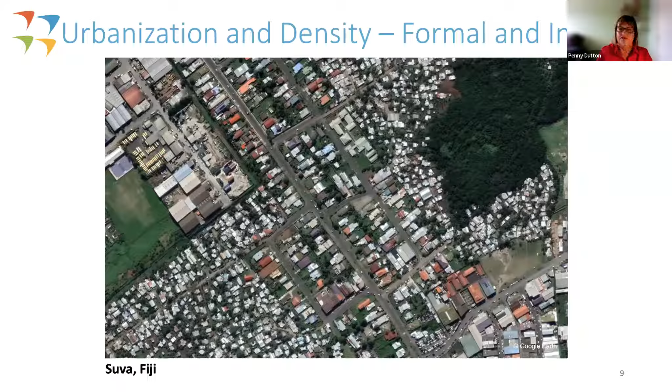City development can take many forms, and as you can see in this photo from Suva, there are dense informal settlements amongst lower density, more formal settlements. Combining that population and urban growth with higher population densities and expansion of urban areas means that managing large amounts of human waste is becoming ever more challenging.

The lack of sanitation can have significant impacts on quality of life, city and national economies, investment, productivity and competitiveness of urban areas, water resources and environment through pollution, and real estate values — who wants to live next to an open sewer or leaking septic tanks? It's hard to sell that property. And public health, of course.

And in the Pacific in particular, I think tourism is something we need to think about and the impacts on that. Having poor sanitation is a deterrent for tourism, and perhaps Hilson might mention a bit more about that.

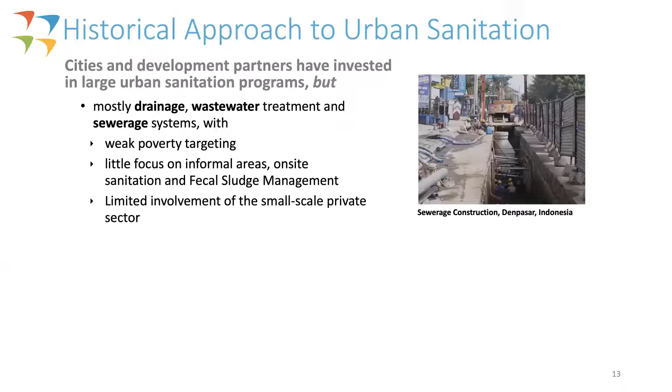In the past, governments and development partners have invested immense amounts of money in urban sanitation programs, but these have been mostly for centralized wastewater treatment and sewerage, which don't serve everybody. There's been weak poverty targeting, so we're not addressing people in informal settlements who often have either very poor quality sanitation or none at all.

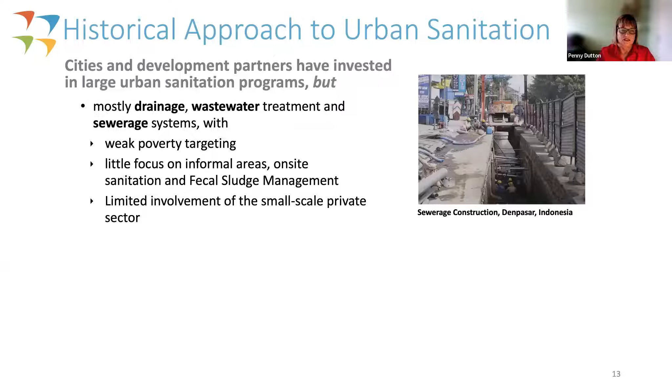There's been limited involvement of the private sector, and not enough investment in regulations, institutions, and human resources.

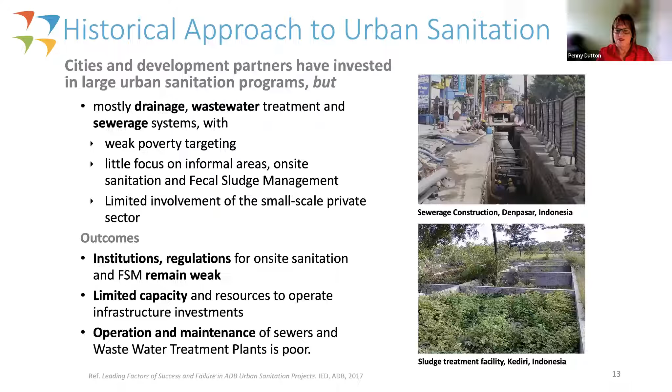Cities often lack the human or financial resources to operate and manage conventional sanitation, and the situation's even worse for fecal sludge management, which often falls maybe not to the utility, but to local governments, city councils, or even departments of health. There's been a very poor track record of long-term operation and maintenance of sewers and wastewater treatment plants, meaning only a small amount of fecal waste ends up being treated.

So what needs to change? Well, governments and development partners really need to rethink the approach and investment priorities for sanitation. All people need to get access to safe and reliable sanitation infrastructure and use it.

Sanitation services need to be sustainable. There needs to be city and national policy, strategies and investments along the entire sanitation service chain. So from containment, from the toilet through to emptying, if it's a septic tank, or through a sewer system, treatment, and then the final disposal, which could be for agricultural uses or other disposal.

Institutions may need to be restructured and regulations passed to accommodate a citywide inclusive approach, and systems need to be in place to monitor sanitation service performance.

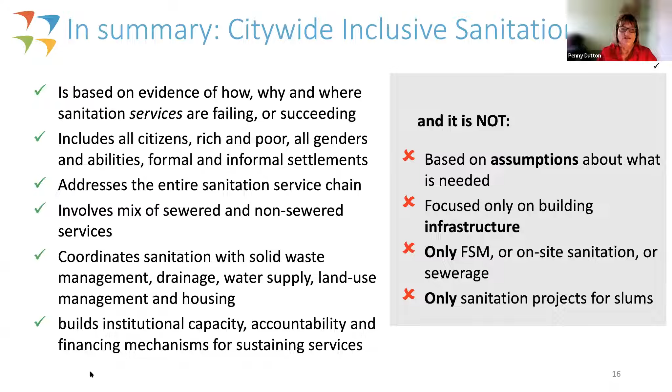It's not based on assumptions, and it's not about building infrastructure only. And it's not just looking at one part of the sanitation service chain. And it's not just serving people in informal settlements. So it's sort of everything.

I wanted to just show you an example of CWIS in practice. I've been involved with some work in Kiribati, and during mid-2020 to mid-2021, I was part of a team that looked at updating a sanitation roadmap that was prepared in 2010. This was, of course, during COVID, which was a challenging time to be working on an assignment like this, but we had support from some very good local consultants, and I see Bettero's on the call today. He was very active and helped a lot.

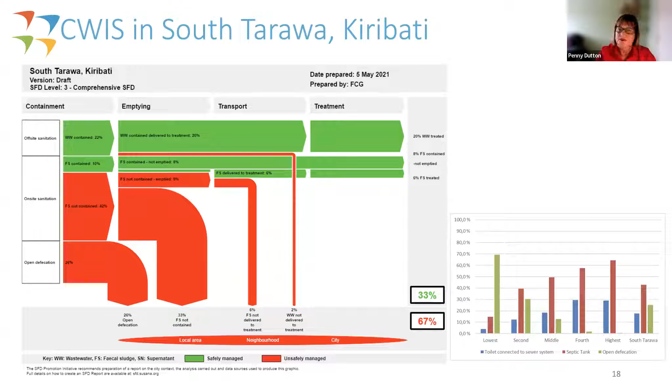The other thing that we did was look at a social development indicator survey and disaggregate data on access to sanitation by wealth quintile. In the chart on the right here, we can see that the lowest income quintile has the least access to sanitation. Nearly 70% of the lowest income quintile are open defecating. So this is evidence which helps inform the decisions for the design of the project. So then we've looked at how we can support the very poorest to get access.

The World Bank has now taken on the design of the South Tarawa sanitation project that's currently underway, and that involves a smaller section, not all villages in South Tarawa. So again, they've had to prioritise based on the budget.

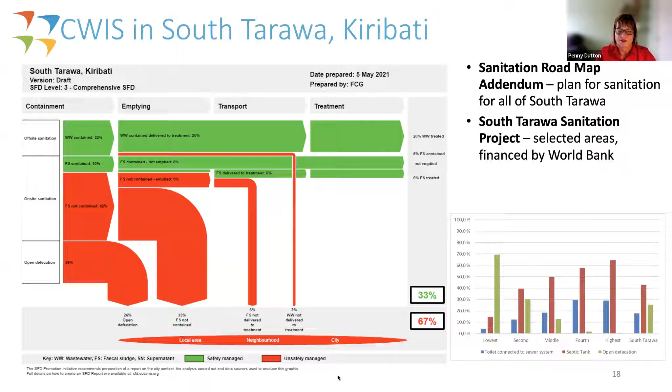So if we look at some of the CWIS features in the current World Bank project, we're looking at inclusiveness and accessibility: toilets for the poorest households are being provided, accessible communal facilities where there's community or public toilets making sure they're disability accessible, and affordability through tariffs and other cost mechanisms.

A mix of sanitation, so it's not actually extending the sewerage system, but increasing the number of connections, making sure that everybody within the sewerage area is connected. But also looking at on-site sanitation, better quality septic tanks, pit latrines in some places, and again communal facilities in some very poor communities.

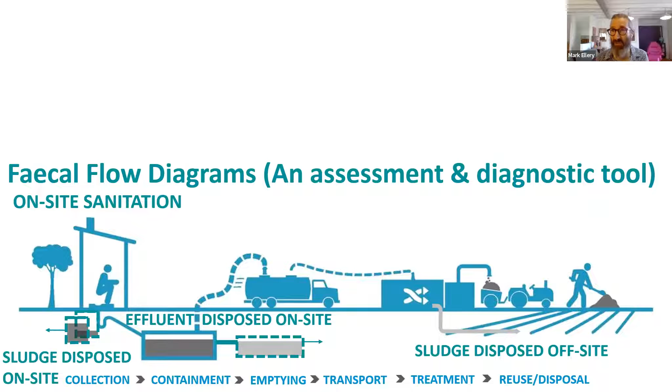Thanks, Bronwyn. Today I'm just going to briefly run through the construction and utility of fecal flow diagrams. Fecal flow diagrams are both an assessment and diagnostic tool that enable us to deal with on-site sanitation with water-based systems where effluent's disposed of on-site and then the sludge is disposed of off-site. They also enable us to quantify on-site sanitation where effluent's disposed of on-site and sludge is also disposed of on-site, and network systems where both effluent and sludge are disposed of off-site.

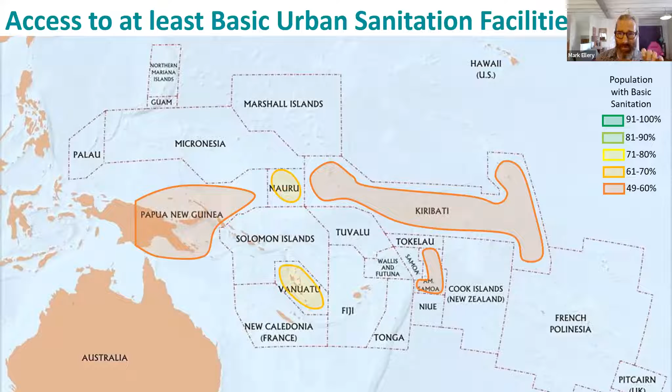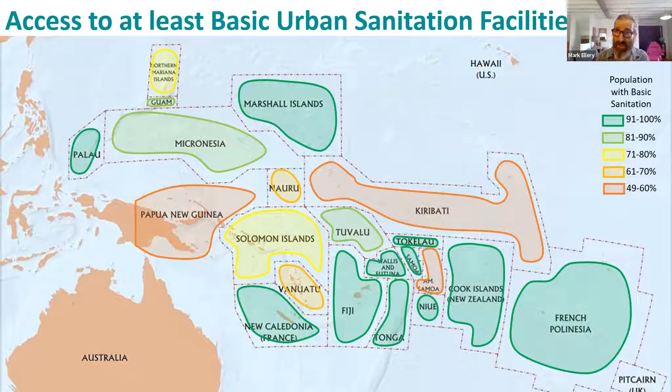What we do know from the JMP is we have data for the Pacific looking at the percentage of countries with basic sanitation under 60%, under 70%, under 80%, 90%, and then a raft of countries with sanitation between 90 and 100% basic sanitation. Now that's access to a facility, but as Leah mentioned, we've only got 5 countries in the Pacific where we have estimates for the percentage of sanitation that's safely managed.

Fecal flow diagrams help us to unpick that. Safely managed sanitation can be broken down into a safely managed service as defined by the JMP, consisting of those 3 elements mentioned before: it's either on-site, or the combination of off-site and the two different options for on-site, whether the excreta is disposed of off-site or on-site. Typically that relates to the construction of sewers, septics, and dry pits, although there's a mix where pits may be wet or dry, but typically dry pits are disposed of on-site.

Again, with the JMP data, we can break this out and look at the mix of the challenges, where the biggest challenge seems to really be this fecal sludge management, where we've got effluent disposed of on-site and sludge disposed of off-site. We do have a significant proportion of waste dealt with by sewers, which is effluent and sludge dealt with off-site. And then in the blue, we have the pit, the challenge of pit containment, typically effluent and sludge both disposed of on-site.

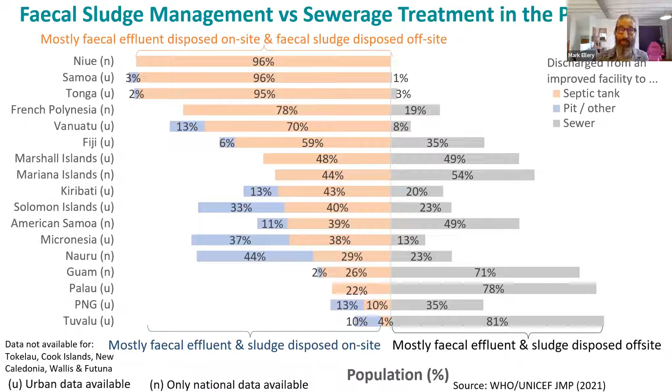On the left side of this diagram, you see the categories that we use for the JMP, and we do have that data on the left side. And as we come across to the right, we have data to break up how much of it is going to sewers, septics, pits, and other. We also know how much of it is unimproved, limited, or no service.

Therefore, the challenge of the fecal flow diagrams is to really break out the rest of the diagram to enable us to do two things. One is to arrive at an estimate for how much of the sanitation is safely managed. And the other is to identify the locus of the risks, to identify where the service chain is broken and where those risks are being posed.

I'm going to run through a couple of case studies, and then I've got a couple that are not necessarily from the Pacific, and then I'll have a couple of conclusions for the Pacific, if you bear with me.

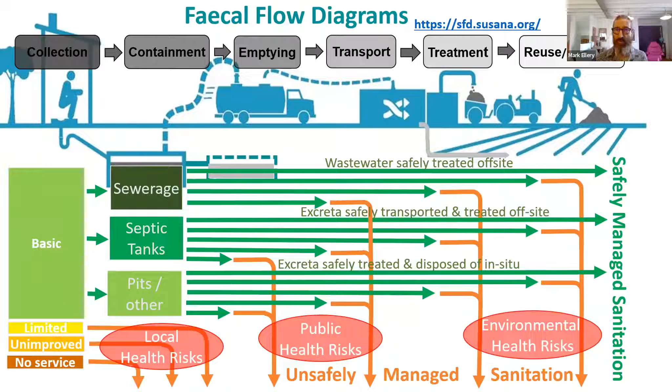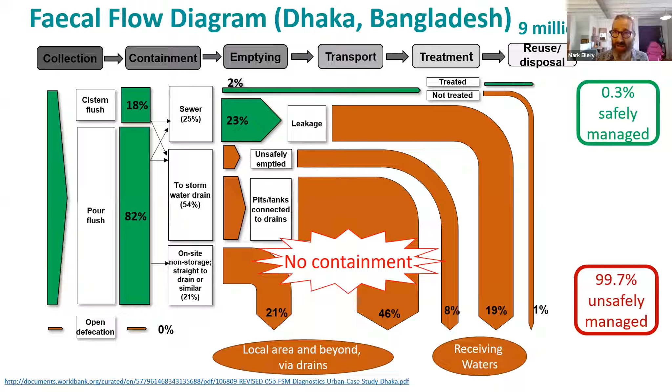The first case study is Dhaka city in Bangladesh, which is astonishing, where 99.7% of the fecal waste in the city is unsafely managed. Astonishing when you consider that 25% of the city is sewered. The challenge here is basically that everything goes into the stormwater drains and is released into receiving waters.

How did this happen? The building code specifies that on-site sanitation waste should be contained in septic tanks with soakaways. However, the soil is silty and dense and can't absorb the moisture. So what was discovered was that even if you had a septic tank with a soakaway, it couldn't absorb enough of the moisture, and so the soakaways were connected into the stormwater drains.

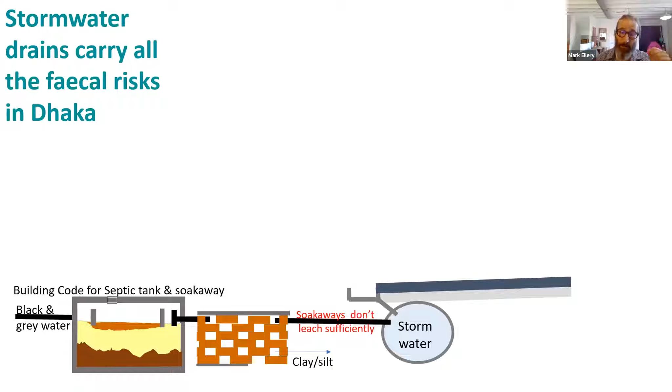Households and builders then started to discover that you could actually do away with a soakaway, and the effluent would still go into the stormwater drains anyway. In this situation, once the septic tank gets full, it starts to operate like a pipe, basically just flowing straight into the stormwater anyway. So you can actually do away with the septic tank because it's not really doing anything.

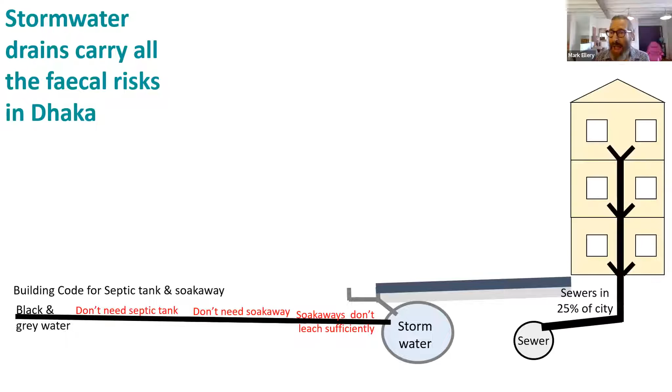There's about 25% of the city on sewers. But the sewers weren't that popular because when they block up, it presents challenges for the household, and it also presents a lot of challenges for the utility. So over time, households were disconnected from the sewers and connected to the stormwater.

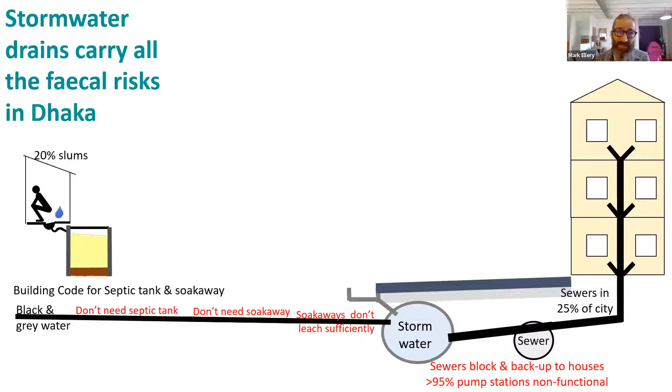When I did the assessment, of the 27 sewage pump stations, 26 were turned off, and you can't turn off a sewage pump station unless you disconnect the houses from it. The on-site sanitation in the informal settlements was informally emptied and dumped into the stormwater drains. Even the formal agreements by NGOs to empty these settlements, even with agreements to dump into the sewers, there's no point because the sewers are turned off. So even the NGOs are dumping into the stormwater drains.

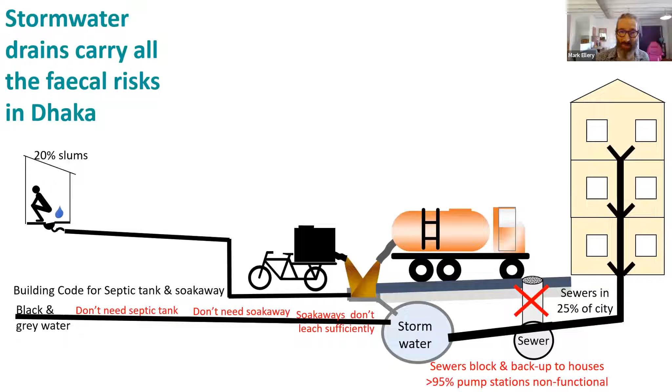The vision for the informal settlements is basically to try to get onto smaller networks, to get their waste into the stormwater drains via pipes rather than via trucks or informal emptiers. The challenge is that there's very low political will to change the situation. By and large, there's a great deal of informal satisfaction with the role of the stormwater drains in removing the risk from the city and transferring it downstream.

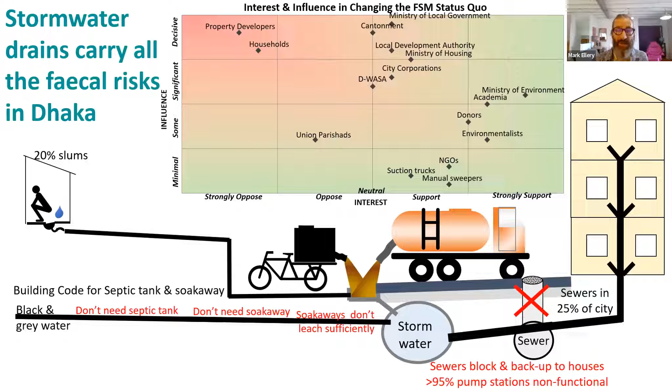Urban Thimphu in Bhutan presents another different challenge for the containment of fecal sludge. Again, here with the fecal flow diagram, you see that while about 60% is safely managed, the city has a small sewer, but the major risk is really with the containment step from on-site sanitation. This is quite particular — there are some very good elements of the on-site sanitation in Bhutan. Allow me just to run through this.

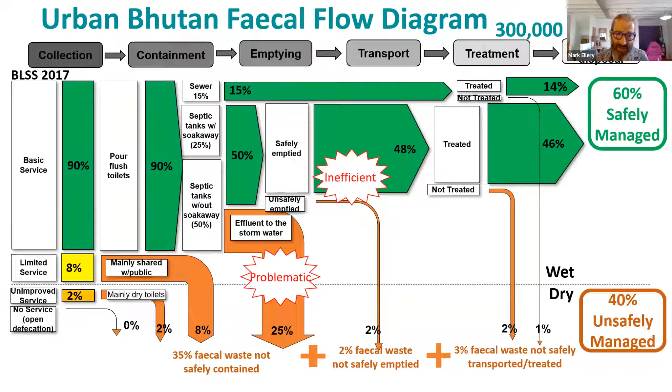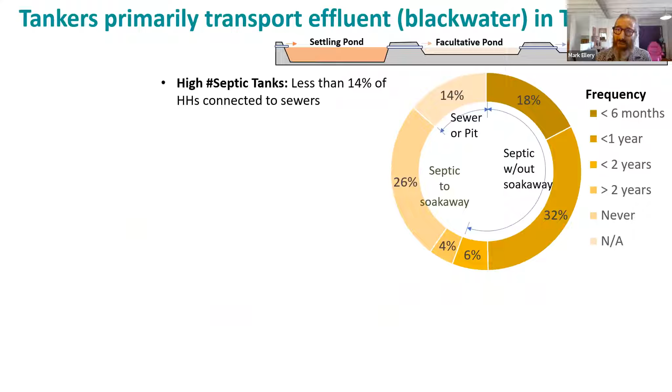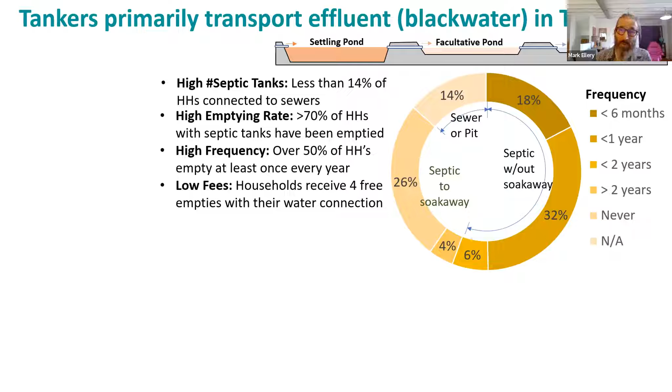The emptying of sewage: 14% of the population are on sewers, and the sewers are quite well managed. The majority of the population within the town are on septic tanks, and the septic tanks are frequently emptied. However, they're so frequently emptied because these septic tanks are not actually septic tanks, they're holding tanks.

The way the perception of a septic tank is in Bhutan is that it's designed as a holding tank, and the effluent discharge pipe is essentially considered to be an alarm bell. When you have effluent that overflows from your septic tank into the stormwater drain, it triggers an emptying of the septic tank. Now, that's not how septic tanks are supposed to operate.

This is essentially possibly the most inefficient, the most costly, and the most high-risk way of managing effluent, because you are transporting effectively water around the city and discharging it to surface rather than discharging it to soil.

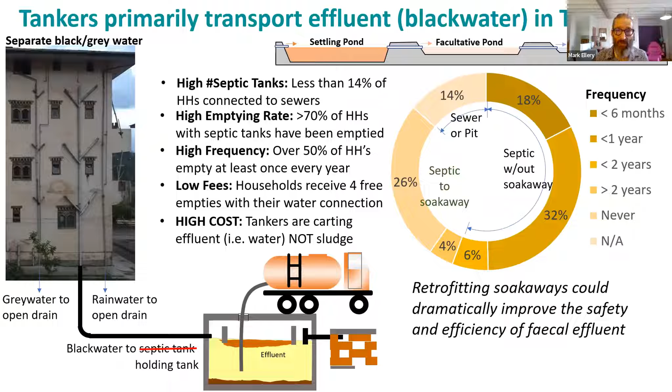The positive side of this system is that these systems are black water only. So the oversized septic tanks do take between 6 months to a year, or even 2 years, to fill up, but they are just filling up with water rather than with sludge. And the soil is an incredibly good neutralizer of pathogens in effluent, so the options of expanding soakaways could dramatically improve the management of on-site sanitation in Thimphu.

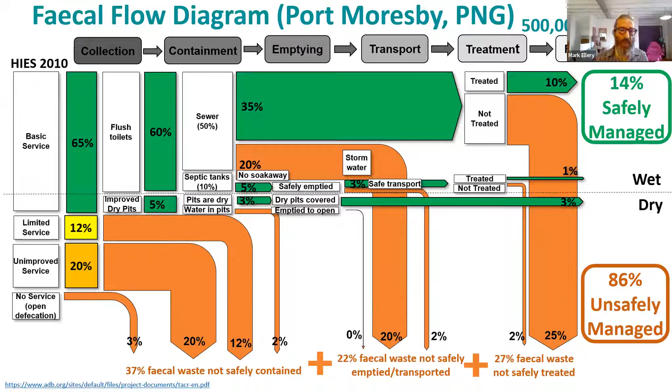The final case study I'm going to share is the one for Papua New Guinea, for Port Moresby, which is a bit more complex than the other two cases, with having sewers, a percentage of on-site sanitation, and also a considerable portion of dry pit toilets. It's useful in these fecal flow diagrams to separate your wet and your dry components, because dry pit toilets really need to be managed on site. It's very, very difficult to transport dry pit off site. So it's prudent to try and separate your wet and your dry.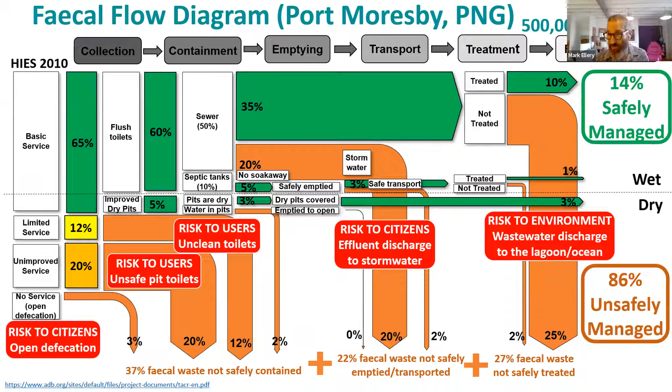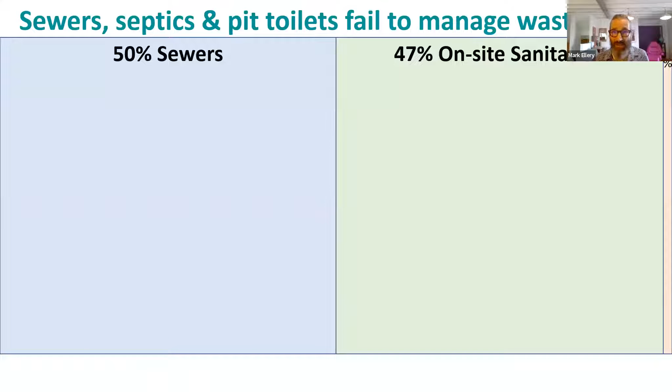The major risks are primarily on containment, with risks around discharge to stormwater and then to receiving waters. The situation in Port Moresby is about 50% of the population on sewers and about 47% on-site sanitation, with 3% open defecation.

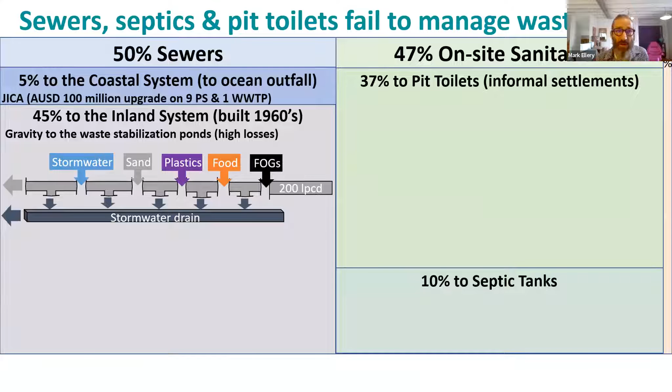The septic tanks and fecal sludge management end up being quite a small percentage of the population. But again, we have very dense silty soil, so it ends up being a combination of a little bit the Dhaka scenario, where fecal waste goes into stormwater drains, and a little bit the Bhutan scenario, where they're prematurely emptied and transported to these wastewater treatment plants.

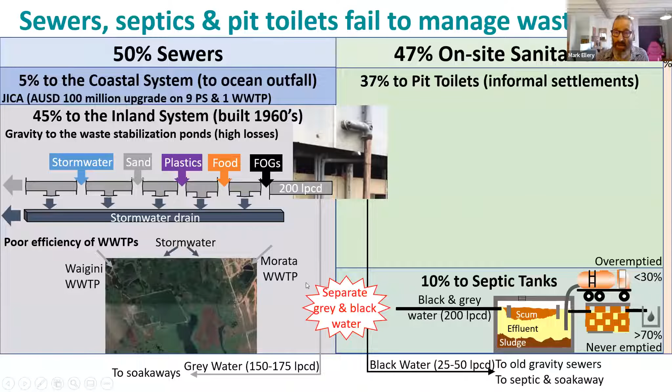On the positive side, the plumbing in households in Port Moresby predominantly separates your grey water and your black water. So in a less than optimal scenario, you can probably maximize the utility of a decaying and overloaded system by reducing the amount of grey water, as well as the amount of stormwater loaded on the system, as well as really managing the fats, oils, greases, food, plastics, sand, and stormwater.

Finally, there's still a significant percentage of the population reliant on pit toilets. The key challenge with pit toilets is managing moisture, and optimizing dry pit toilets really relies on minimizing moisture.

So, I think three quick reflections for the Pacific from these three case studies. Firstly, on sewers, I really think we need to understand the extent to which sewerage pumps and sewerage pump stations are turned off. It was really difficult to get to the bottom of that in Dhaka.

But with the introduction of smart kilowatt-hour electricity meters, it's quite easy to generate data on whether pumps are turned off or on. It also generates data enabling us to understand whether pumps are discharging to open, because the load will change on those pumps, depending on whether they're pumping into a rising main or into receiving waters. The second point is the importance of soakaways in neutralizing pathogens. Septic tanks really are a pre-treatment device.

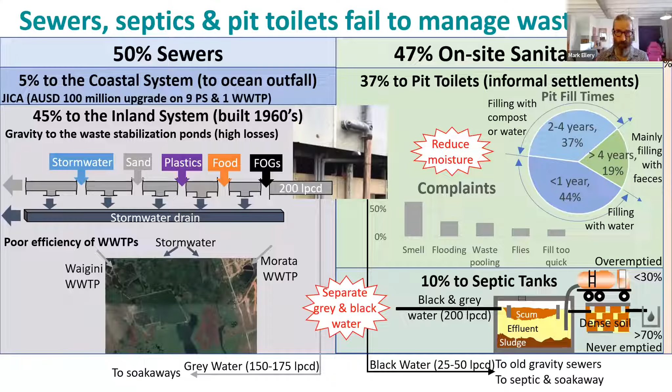Thanks so much, Mark, and great to have your key message for each of the sanitation options there at the end to close. You've given us a lot to think about, and I think now we're going to head to Vanuatu.

Hilson Toaliu has been working in the WASH sector for over 25 years, working with the Vanuatu government, NGOs, and UNICEF. He retired from UNICEF in 2019, has been involved in WASH consultancy since then, and is currently working as the National WASH Consultant on the ADB TA Strengthening WASH Practices and Hygiene Behaviour Change in the Pacific. So we'll hand over to you to explain the sanitation situation in Vanuatu.

Thank you, Bronwyn, and hello everybody listening from across the region. I will be presenting the experiences of citywide inclusive sanitation in Vanuatu, and give you some experiences of this work here. When I'm saying Vanuatu, it is basically Port Vila that I will be focusing on, not necessarily the whole of Vanuatu, but the city of Port Vila.

Next slide, thanks. This is the map of Port Vila. As you can see, it is growing very fast, and in the national census of 2016, the population of Port Vila was found to be 53,944 people living in about 10,965 households.

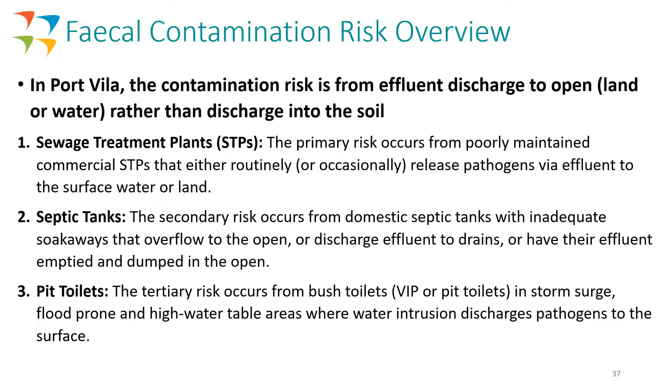Next slide, Dean. I've mentioned the risks posed by the different types of sanitation facilities. The highest risk is really from sewage treatment plants discharging into the open, and we have at least 15 sewage treatment plants in Port Vila, but 3 of them are of higher risk.

That is the Vila Central Hospital with 200 beds, Iririki Island Resort, which I referred to earlier, with 139 rooms, and the Grand Hotel, also referred to earlier, with 72 rooms.

Their treatment plants have been designed to effectively treat the effluent and sludge before discharge into the water. But on assessment of these facilities, it was seen that the difficulty is really the poor maintenance and operation of the sewage treatment plants, which do not really treat the effluent well before discharge into the open.

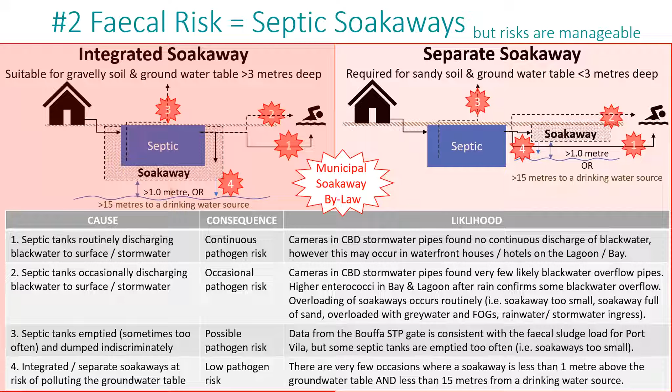I mentioned the dry pit - less than 15% of households in the Port Vila area, especially confined to the suburbs of Port Vila which have black sand, have this concentration of pit toilets. As I said earlier, the risk from pit toilets is really the overflow or filling up of the pit toilet by surface water or water surging into the pit and overflowing the content to the surrounding ground, or even to groundwater wells nearby.

But this is specifically confined to black sands and some in the Erakor area, which is also outside of Port Vila. So although it is there, it is localized to these areas. Next one.

The idea is, where pit toilets exist, to offset them with water seal toilets. Next one, Dean.

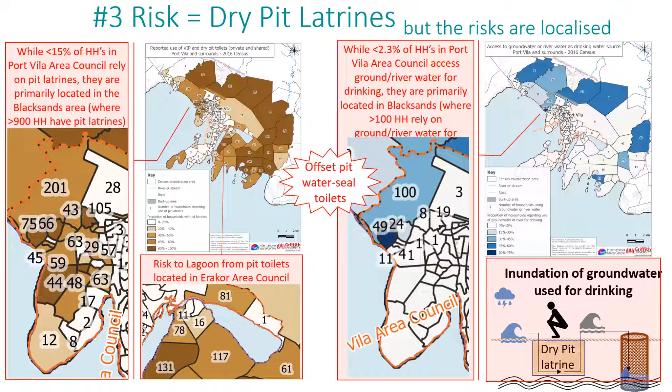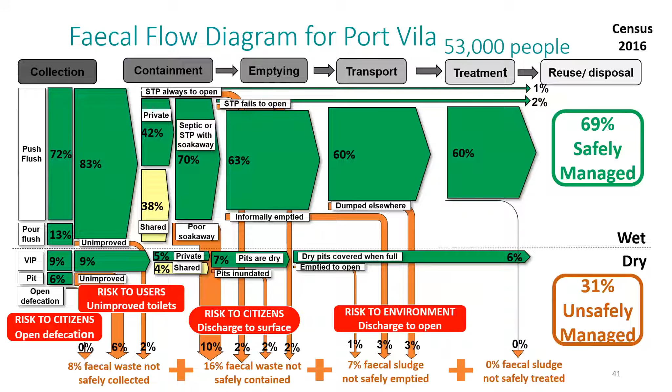I think that is it. Thank you very much.